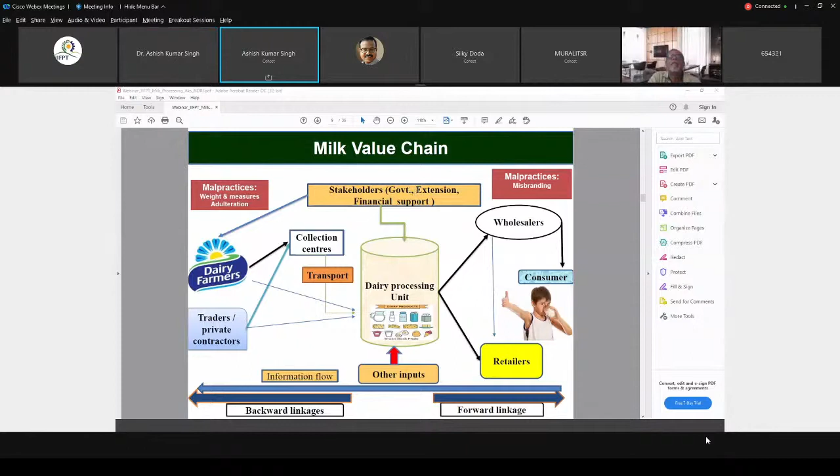So how best we communicate, and there are many challenges like malpractices and misbranding, and a lot of stakeholders. So how to do it in the form of backward linkages or forward linkages, that is the real challenge. And before one ventures, either as an individual entrepreneur, in a group, or in a formal organization, first of all they have to understand the different players and how best they can create synergy among the various players.

Here I want to give an idea of the different types of supply chain existing. If you look at the first chain, where the producer is directly selling their produce to the market, either liquid milk or some processed product, definitely the transit time will be less. So the problem of adulteration or spoilage is usually minimized. The producer will get a remunerative price and the consumer will get a good quality product.

The more the stakeholders, the longer the transit time, and issues like high microbial count, zoonosis, adulteration, contaminants, and preservatives generally emerge when we have a number of intermediaries in our supply chain.

And nowadays, whenever we talk to a common person about milk quality, he always considers it as freedom from any kind of adulterant. But milk quality is a very holistic approach. It's not only related to that, but also to pathogenic microorganisms, microbial counts, and antibiotic, pesticide, and heavy metal residues. Many processing-induced contaminants may also come during processing.

So it is our responsibility now to make people aware of the other challenges and the food safety issues which we normally encounter during the supply chain. As far as the cold chain status is concerned, the Ministry of Food Processing Industries has done a lot, but still this is quite dismal.

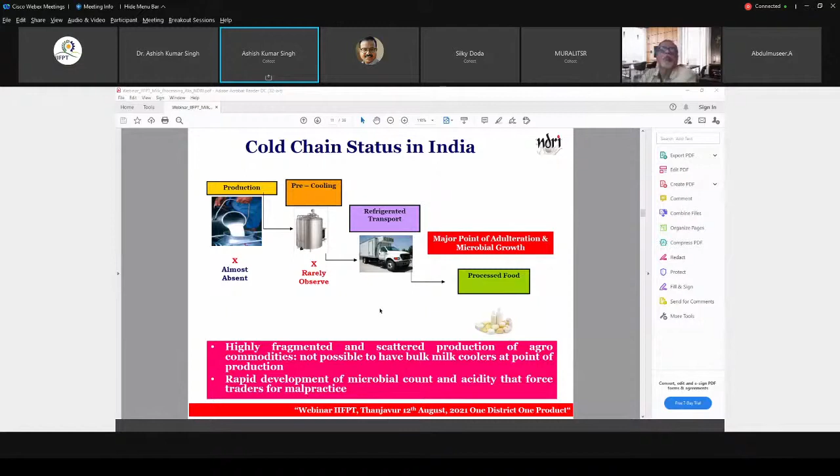And moreover, the utilization, because the majority of cold storage stores are generally occupied only for 6 months, and that too for a limited range of commodities, mostly horticultural commodities. Then, if we have to transform this unorganized sector into an organized sector, the very first challenge is how we can ensure uniformity in the raw material. If the raw material is good, the finished product quality will definitely be better.

For that, we have to adopt appropriate technological packages, because the kind of production technology used in the unorganized sector is not scientifically based. There is a lot of generation of residues. There is very little emphasis on the fat, SNF, the initial product quality, and optimized parameters.

Another requirement is how we can adopt the process line for indigenous or traditional products, an energy-efficient service system to support production, effective packaging, and moreover, for an entrepreneur or business person, what is the optimized product mix which will ensure a better return? That is also one area where we have to work and communicate with the processors.

Then, how to implement stringent quality assurance, hygiene, and safety provisions, especially under the ambit of the food safety guidelines. Another challenge, or information which is very important for any new person, is how to design effective marketing and promotional strategies. I will give you some examples subsequently.

Just see the raw milk revolution, because despite the benefits of consuming pasteurized milk, a majority of consumers still prefer to consume raw milk. India is one such country where there is no prohibition under the law against selling raw milk in packaged form. But there are a number of challenges which we often discuss with entrepreneurs. The best option is to go for a glass packaging system instead of polymer packaging. Innovations like vending machines are also important.

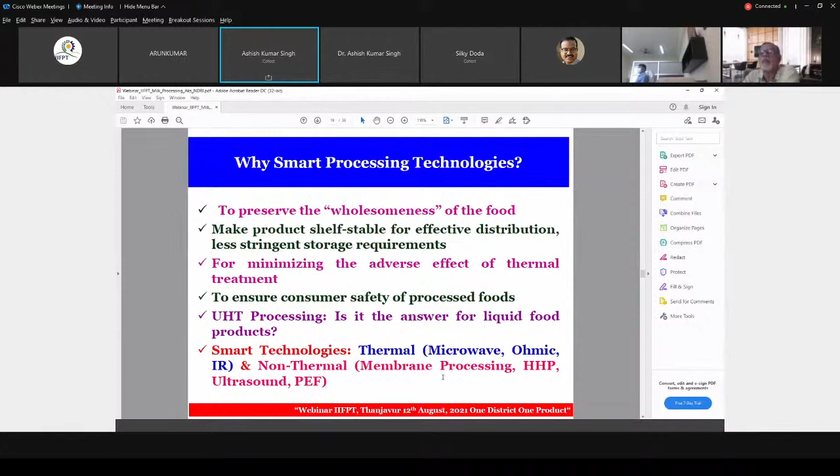Then promising packaging solutions - I will not go into detail, one of my colleagues, Dr. P.N. Raju, will discuss that. But this is the time when, at least for the niche market, we have to look for smart or promising packaging solutions for our dairy products to ensure safety.

Then, dairy industry cannot survive only with a limited range of products. So definitely it is an opportune time to diversify, and they have to keep on diversifying, because in dairy products, especially in the northern belt, there is another issue of seasonality. Some products are only popular, quite in demand, in a particular season.

The industry has to keep on adding a new range of products, and the base for this kind of work should be pleasure or sensory attributes, convenience, and health attributes. Whenever we design or formulate a new product, these are the three important components which we have to give due consideration.

So prospective categories of dairy products are like fortified and ethnic dairy products, gourmet food, functional beverages, composite or fusion food, and then specialized products especially for geriatric or aged persons, for weaning purposes, or for people suffering with one or other kind of diseases. For that also, milk is having a lot of scope.

So liquid milk can also be a very ideal source of delivery system for micronutrients. In our institute, our research group has done a lot of work on micronutrient fortification using vitamin A, D, calcium, and iron. Milk is one of the ideal vehicles for delivering these micronutrients, especially the skim milk. After fat removal, there is substantial reduction or almost complete elimination of vitamin A and D.

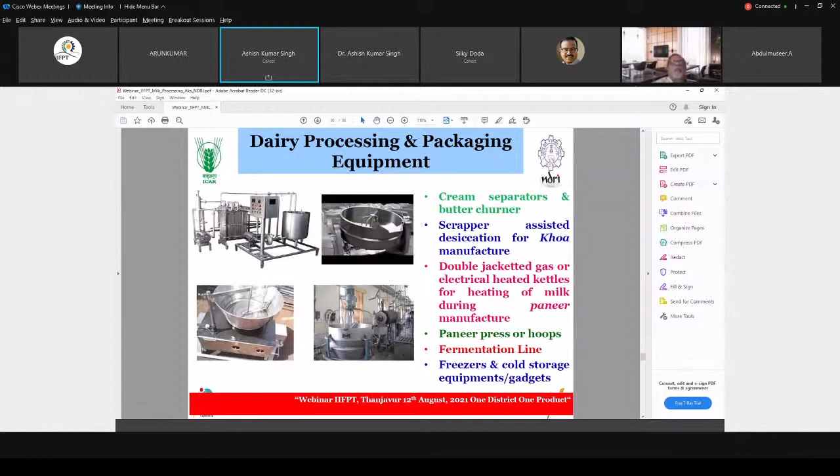This is a very positive sign, and as I mentioned, especially from an energy efficiency point of view and slightly more automation point of view, the dairy processing equipment manufacturing industry still has scope to work on those aspects. This is also a very important time when the government has launched a very good startup ecosystem which is in place, providing opportunities for capacity building, consultancy, outsourcing hub, business incubation centers, testing facilities, and IPR related issues.

So all under one roof, one can get all this information. I'm just giving you two success stories of our incubation center. The first is Misty Farmer Producer Company, a consortium of around 300 milk producers.

We worked with this group on both backward linkage and forward linkage, assisting them in improving their milk production, productivity, and quality. We also provided plant and machinery to start their business. They purchased technologies like Bajra Lassi and whey-based drinks, and with us, they innovated products like milk-based sweets using non-dairy solids such as fruits and vegetables. Currently they have a turnover of around 2.5 crore rupees, collecting around 7 to 10,000 liters of milk per day.

Another innovation is by a couple who own a farm with around 250 animals of good productivity. They simply chill the milk, fill it in gable-top biodegradable packaging, and sell it in the niche market at around 150 to 160 rupees. They are even converting their surplus fat into butter and ghee, and all kinds of technical support for that is provided by us.

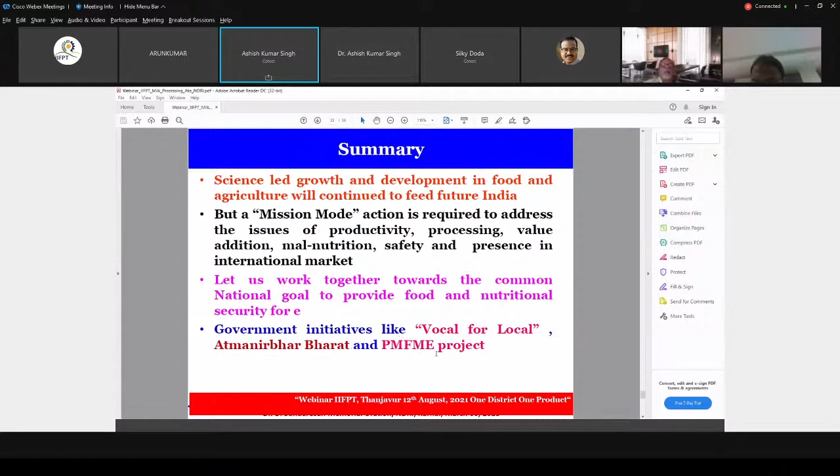Government initiatives like Vocal for Local, Atmanirbhar Bharat, and the PMFME project can be an integral part of this journey. Thank you for giving me this opportunity to present, and for your patient hearing. Thank you, sir.

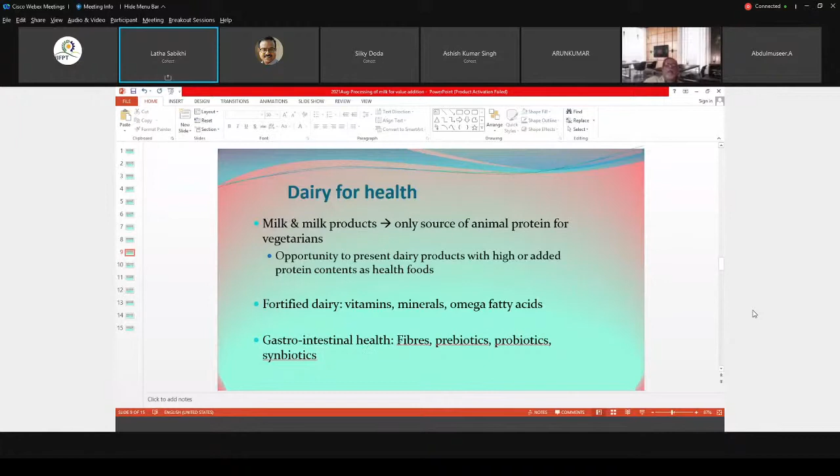And the dairy products can also be fortified with vitamins, minerals, and other nutrients, omega-3 fatty acids. And for gastrointestinal health, the addition of prebiotics, probiotics, and their combination, synbiotics, increasing the fiber content of the dairy products. All these are the choices that one has when we are talking about dairy processing.

Then dairy for health can also include plant ingredients to increase immune health, and products for a particular segment of people, like geriatric products, products suitable for lactating women and women who are breastfeeding, for children, infants, and those involved in sports and a more active lifestyle. Foods for diabetic individuals, those suffering from CVD, and our ancient science of Ayurveda always had medicines which include dairy ingredients for helping the health of eyes, bones, skin.

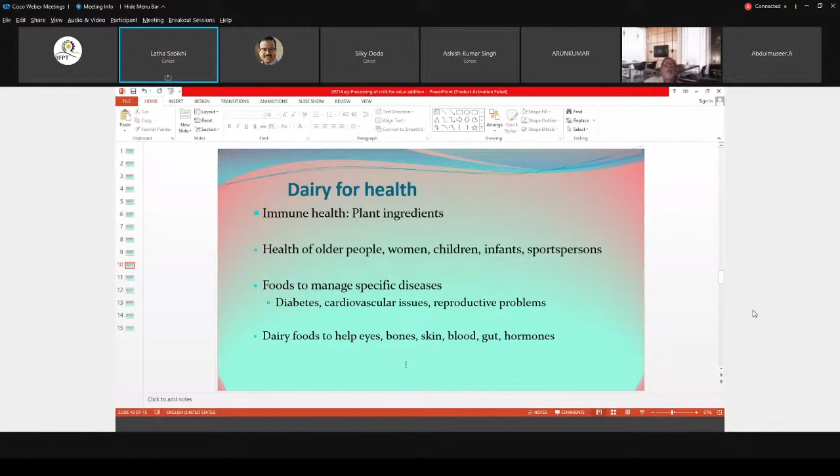Maybe in place of these medicines, we can position the dairy products themselves as food, so that their routine consumption can keep us away from these diseases. Non-bovine milk: a lot of R&D activities are going on in this, and dairy products such as cheeses, powders, and other value-added ingredients can be processed from these.

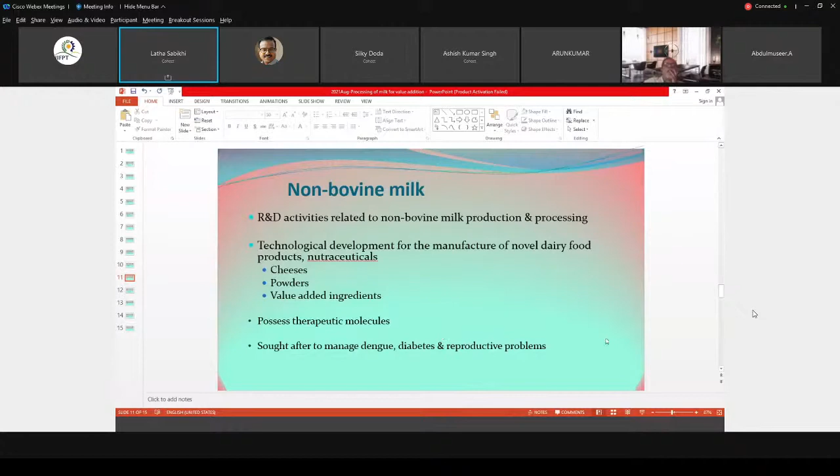We already know that goat milk is being marketed to manage the mosquito-driven disease dengue, and camel milk is positioned as being good for diabetes. However, a lot of scientific intervention is required now, more than ever, so that the particular ingredients responsible for these therapeutic actions can be identified and maybe marketed as high value, low volume products.

Now, the way forward for the dairy processors and dairy manufacturers: there is commercial value for high value dairy products, which can be applied in the food and pharmaceutical industry. I concede that this is one segment which requires higher infrastructure. But as a part of the classification I had done earlier, we have milk protein concentrates, buttermilk powder, whey powder, colostrum ingredients, modified milk proteins, whey fractions, which are all high value, low volume ingredients that can be part of this niche product area.

For a larger canvas, we already have a thriving dairy industry. We have a lot of cooperative societies, the milk federations in the states, and also other multinational and local companies which are making and marketing dairy products. However, there are still problems, and this organized dairy is only a very minor fraction of our dairy industry.

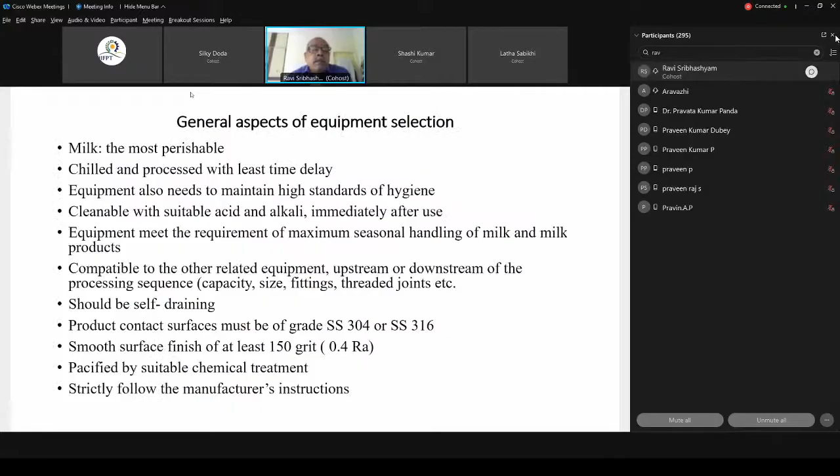Let me briefly tell the aspects of the equipment. Milk is the most perishable of the agricultural commodities. It hardly has a few hours, maybe maximum 3 to 4 hours. So it has to be chilled without any time delay. That's the most important. In any processing aspects of the dairy industry, time is always a factor.

And since it's an edible food product, it's perishable as well as a food product. So high hygienic standards have to be maintained for the equipment, and it should be cleanable. So the design aspects of how the equipment are joined and designed should be appropriate for cleaning, with CIP cleaning or even manual cleaning. We'll see with slides some of the details of it.

The dairy industry being seasonal, it has to take care of the maximum demand when it is happening, say October to February, the procurement. So it should meet the maximum demand day. So mostly, because of the seasonality, the equipment will be over-designed. If buying the entire assembly in one go, it should not be a problem.

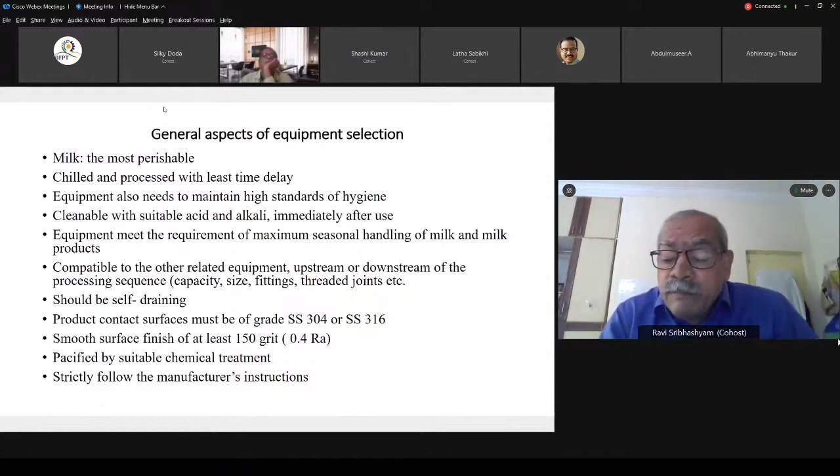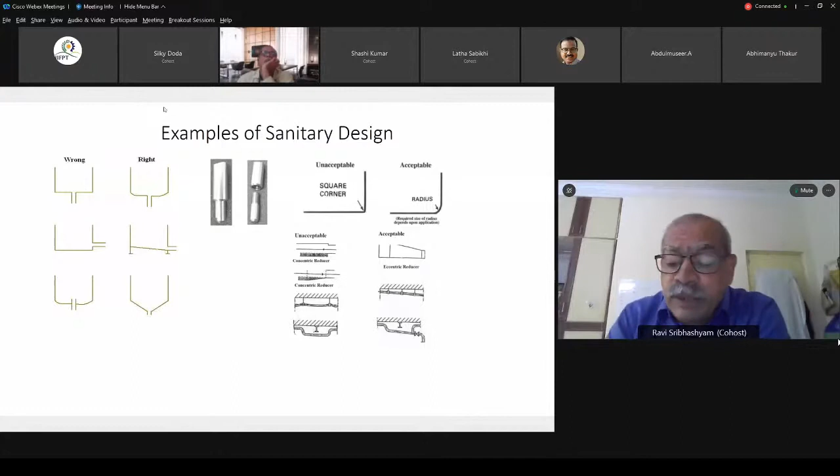Even in the pipelines there are invisible contaminants. If you see the pipelines, from a large pipe to a smaller pipeline, unless there is a proper joining, there can be an accumulation of liquid. And moisture is the best medium for bacteria to transport. Even the slope: over a period of time, it may get saggy, but you should take care. There must be proper sloping. These are actual defects. If you see over here, the water is still stagnant, so that should not happen. Even a little bit of water accumulation will be problematic.

And also the welding: all the welds should be properly ground to smoothness. In engineering welds, they say if you grind it, the strength will go down. But here the welding has to be ground to smoothness. That's the difference between normal equipment and the hygiene that has to be there.

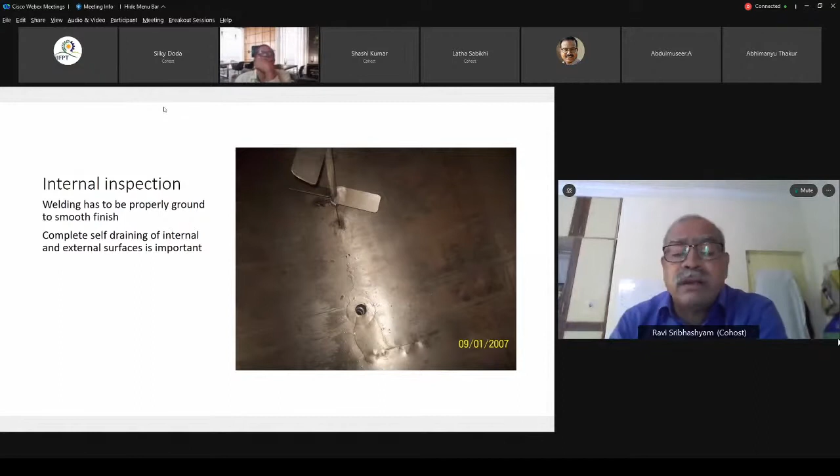Here again, this is an actual photograph taken during inspection. The welding spatter is still there, and that means over a period of time it will get dislodged. Of course, it's a contamination, but it will also get dislodged and go into the milk or whatever the preparation. It is actually a ghee tank that I had inspected, and I was surprised to see such a poor finish. So do not just trust.

Even while the fabrication of the equipment is going on, you can insist with the manufacturer or supplier that you will inspect the equipment during fabrication itself, because once insulation is put on, you cannot exactly test the finish of the system inside.

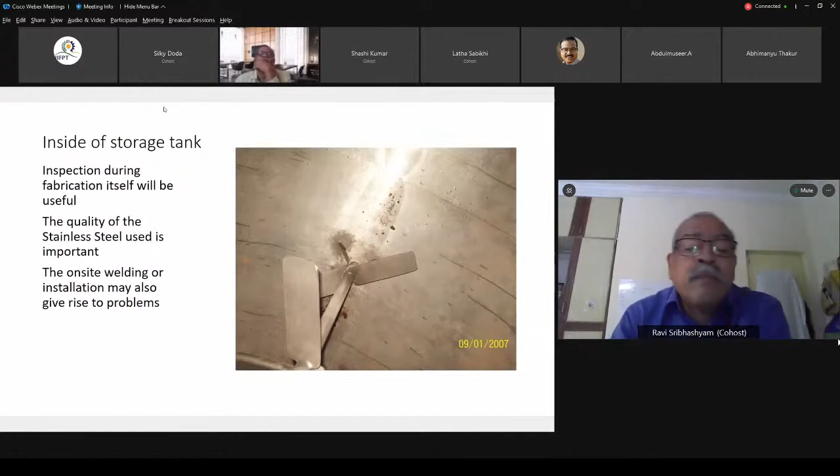Yeah, the speakers were insisting on cold chain, etc. The very first equipment that we encounter is the bulk milk coolers. Bulk milk coolers are generally given to the ISO 5708 standard. But there are certain minor details. Say it is 5708, 2A in Roman numerals. 2 means it's suitable for 2 milkings.

Again, a crucial point. That means it can cool half of the milk collection in the morning and half in the evening. A is the ambient temperature limit, say 38 degrees centigrade or so. And also 2 is the speed at which it is cooled. So 2 means it will cool the first milking, that is half of it, in 3 hours, and the second milking, added to the first milking, in 1.5 hours.

Here comes the devil in the detail. It's a European standard, so they assume equal milking, equal quantity morning and evening. But actually in India, the farmer supplies the high-fat milk in the morning and keeps the low-fat milk for his own consumption. So usually it is 60-40 or even 70-30.

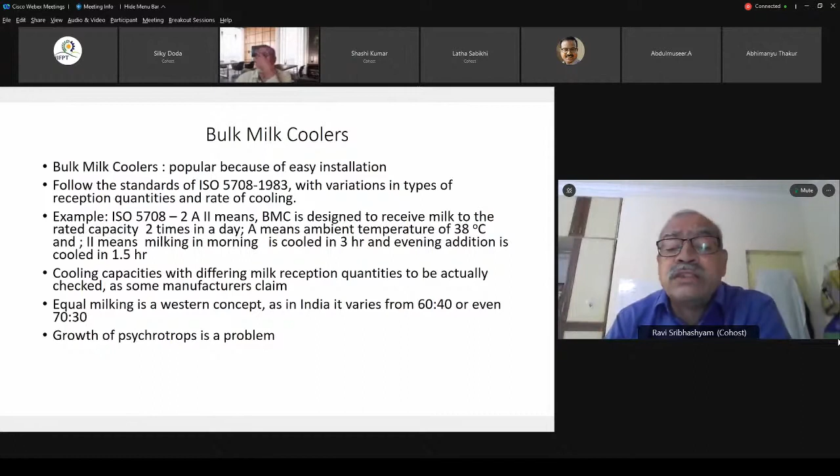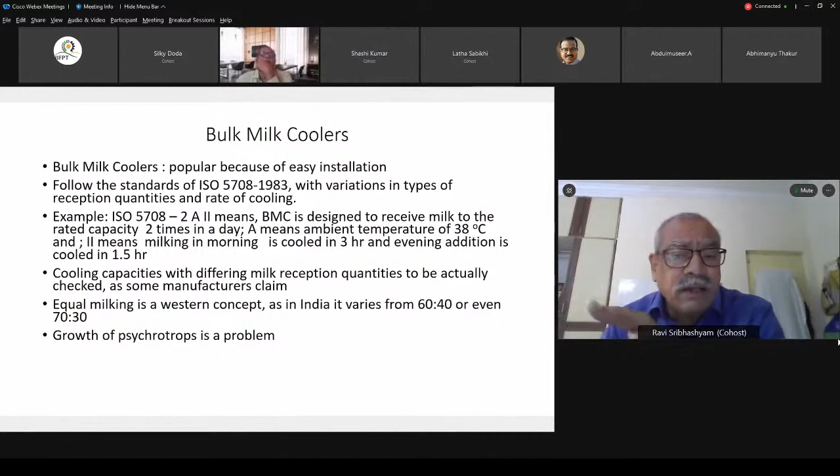So the size and capacity of the bulk cooler is crucial when you are selecting. If the capacity is small, then cooling is slow. If the capacity is too large, then milk may even freeze if the control systems are not that good.

So here the bulk coolers are of 2 types: direct expansion type, where the refrigerant is directly put into the dimpled outer jacket of the tank. This is the bottom view of the tank. So these dimpled sheets are the costliest component, and usually it's imported. Nowadays, I think probably it's being manufactured in India also.

The other one is the IBT type, where the tank is there, but at the bottom there will be a liquid water tank. Submerged in it are the cooling coils, that is, the refrigerant coils. And the pump will spray the chilled water to the side. The small advantage is that you can run it for a longer period of time with a lesser capacity compressor.

And nowadays, instead of 3 hours, the concept is you bring down the temperature to 10 degrees fast. And then if it is a bit slower also, microbiologically it is not that significant. So what we can do is have a small plate heat exchanger. We'll discuss later on. The plate heat exchanger can be fixed, and this chilled water can be circulated in parallel to the milk that is being circulated. So that is one innovation here which can increase the speed.

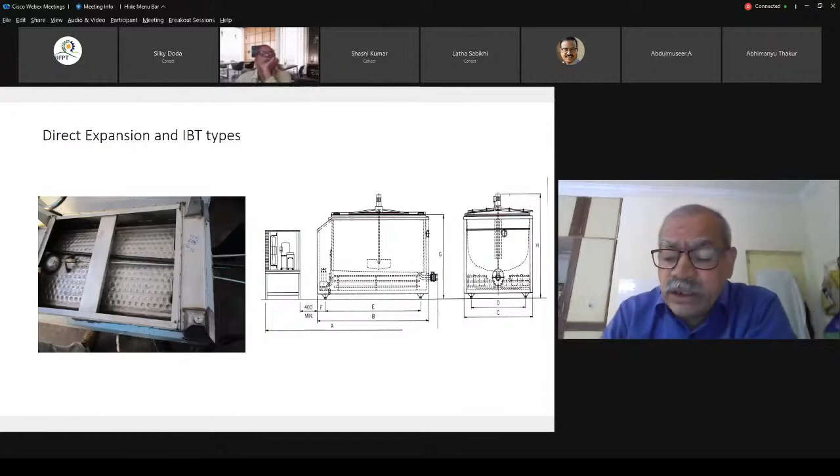The other innovation is in the refrigeration system. The heat that is expelled in the condenser can also be stored, and the efficiency can be improved. These are the wide varieties, where we have the direct expansion type, shown earlier, and also the ice bank tank type. The sizes differ from 300 liters to 5,000 liters.

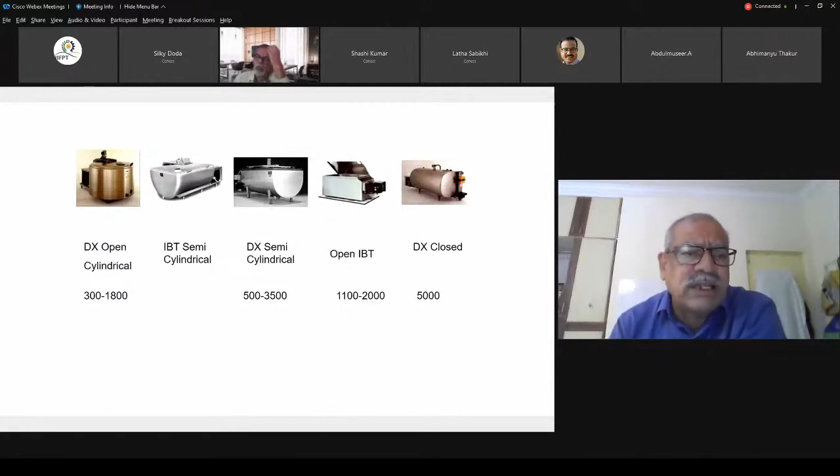Generally, from the management point of view of the collection center or the overall economics, they say that minimum it should be 1,000 liters or 2,000. Very few villages or village clusters are getting more than 1,000 liters. Especially here, the problem is too many players are chasing too little milk in villages. This is a fact. So therefore, each player is getting much less than 1,000 liters or 500. It's not like in Gujarat, where each collection center itself will be having 10,000 liters. So the crucial thing is the capacity of the bulk cooler that has to be chosen.

So this is the IBT type over here, and of course I had already discussed things. If you add a small plate heat exchanger, then the speed of cooling up to 10 degrees is fast; this is the best way. Bulk milk coolers, if not located properly, and if you are collecting milk from far away, then it is a waste, because the psychrotrophs will grow, and that will cause bitter peptides in the milk. So location and size of the bulk milk cooler are crucial. And many of the dairies felt that it is better to have a chiller directly at the plant.

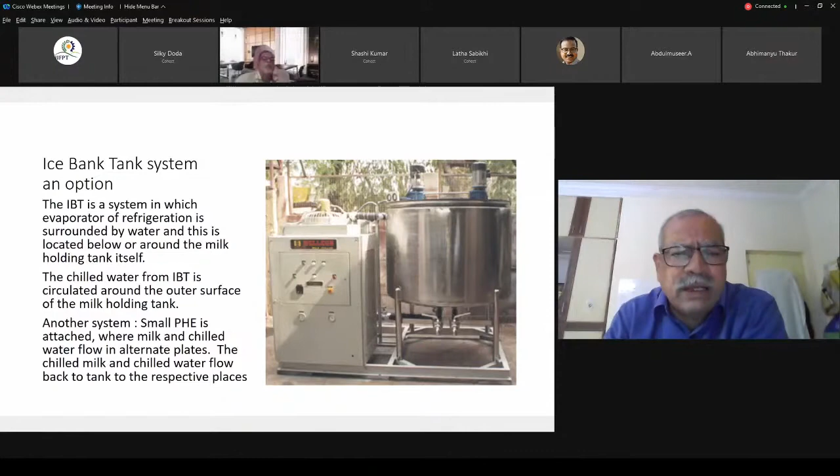So the next equipment is the plate heat exchanger, where the frame will be there to which the plates are hung, and the gap between the plates is maintained by the gasket, and in the plate pack, one is at the fixed end and the other is pushed, and the plate pack is brought together. The advantage is you can see the surface of the plates for cleanliness, and the corrugations bring rapid transfer of heat, and instead of a bulk cooler where the milk is in bulk quantity, here a narrow thin layer is passing. Therefore, in a few seconds the milk is chilled down to 4 degrees centigrade.

This is the main advantage of the plate heat exchanger. Now it is ubiquitous in most of the dairies. Plate heat exchangers are being used for many heat exchange applications. Alternate gaps carry the process fluid, and the other alternate gaps the service fluid, which may be chilled water to chill or hot water to heat, as we see in the plate pasteurizers.

So this chiller must be properly designed, with capacity matched to the previous dumping rate, or the tanker dumping rate, and also to the next processing storage tanks, etc. So the chiller capacity must be synchronized with the upstream equipment, crucially. Then downstream it may be a storage tank.

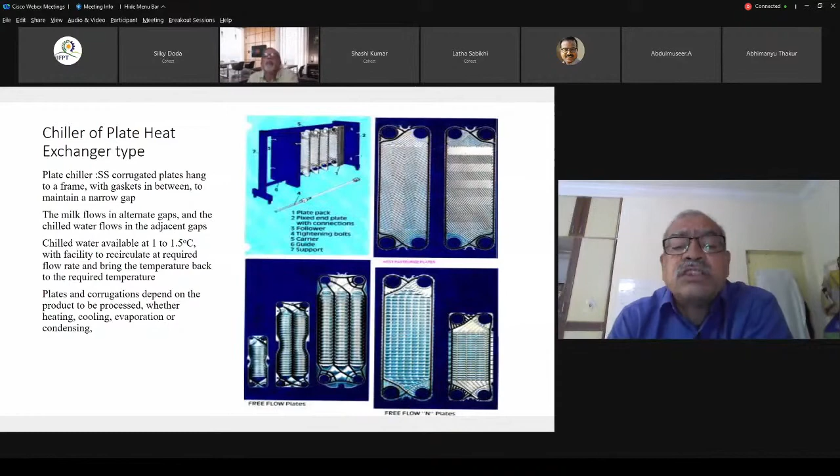expanded polyethylene, and that also should be of sufficient thickness not to raise the temperature by 2 degrees in 18 hours. That's the standard. So you should fill the tank with chilled water, say at 4 degrees centigrade, and see that the temperature does not rise. That's how you will test the storage tank. And also there shouldn't be any leakage.

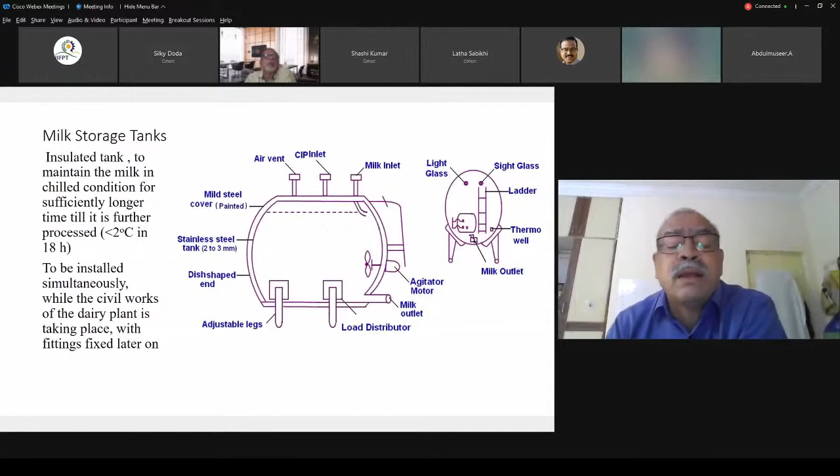But the storage tank should not be filled to a very limited load. If it is 10,000 liters, don't keep 1,000 or 1,500 liters; the temperature is going to rise faster. That's an important thing. You have an agitator through a reduction gear system, agitating around 28 to 30 RPM. Care must be taken that the lubricating oil does not flow into the milk and create an unhygienic condition.

So the next stage of processing is pasteurization. For small scale, batch pasteurization is the best one. This is low temperature, long time, that is 63 degrees centigrade for 30 minutes, though the time temperature combination may vary. This is a double jacketed one. The inner cylindrical vessel is surrounded with a jacket in which hot water or chilled water can be supplied at a particular rate. A continuous circulation one is also possible.

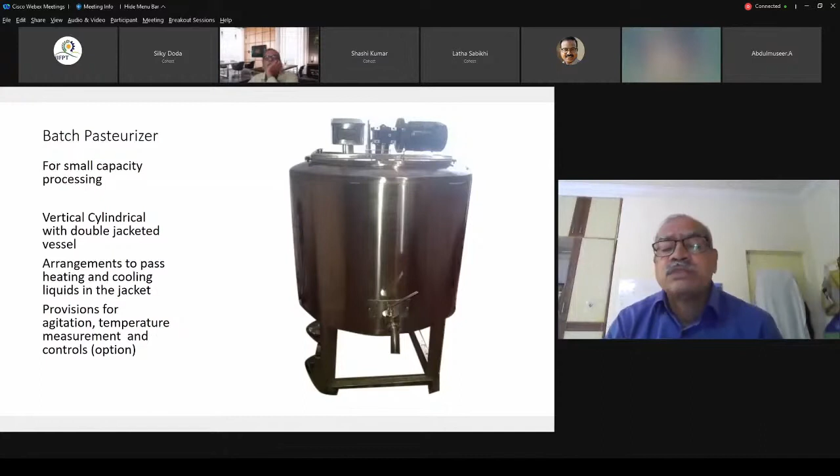The temperature has to go up from the 4 degrees centigrade of the storage tank to 63 degrees centigrade, which will take time. Then it is held at that temperature for 30 minutes, and then the hot water is drained and chilled water is supplied. It has to be provided with an agitator, and some controls may be there. You can choose from 100 liters to even 1,000 liters. It's a multiple purpose tank; it can be used for other purposes also, even for storage if it is a small scale one. So it's a versatile equipment.

The other one is the HTST, the high temperature short time one. Earlier, installation capacity used to be a big affair, from 5,000 liters to 10,000 or 20,000 liters. Now skid mounted units are available, very easy to install, right from 100 liters per hour to 500 liters and 1,000 liters per hour. For a small scale operator, this will be ideal.

Only thing is you must have a steam supply and chilled water supply for this, and they should be of sufficient quantity to match the capacity. Sometimes they may not match the outside one, so you have to take care of that. The temperature may be 72 degrees centigrade for 16 seconds normally, but because the quality of milk is poor, we may go to a higher temperature, 78 degrees centigrade, and cooled.

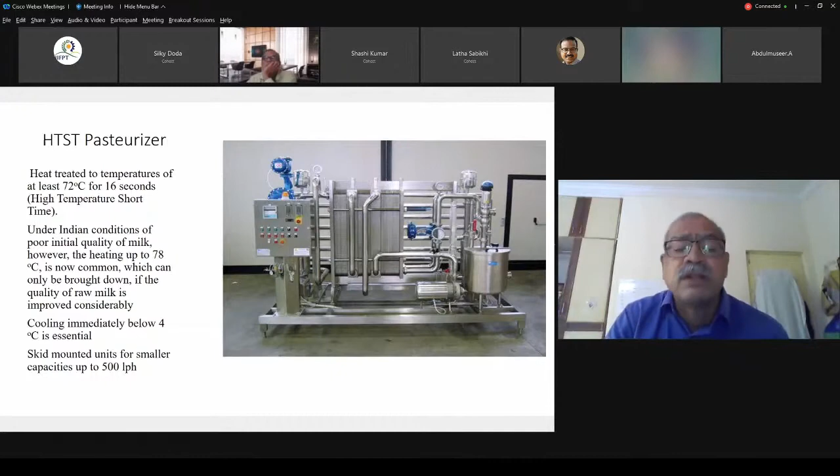Here it may not be possible, but if it is a larger one, insulation is important, especially insulation of the equipment. So this is the one equipment. It is linked to the cream separators also, so that at a particular temperature it can be taken out at 40 degrees. The cream separator can also be there.

If I go through the sequence, the pump is here. The flow rate is controlled so that it will pass through the holding section for 16 seconds. This has to happen at the installation time itself, that's the important one. Then it passes through various sections, each being nothing but a plate heat exchanger, with a connecting plate so it can be tapped for various other processes like cream separation or homogenization.

So at 40 degrees or so, it may be connected to filters and cream separators that must match the capacity of the pasteurizers, again an important one. Then the heating section, then it may go to around 55 to 60 degrees, to the homogenizer, and then back for heating.

The heating is done by hot water, not directly by steam. The hot water is generated either through an expansion vessel in which steam is directly introduced into the circulating water, or through a plate heat exchanger, or even a tubular heat exchanger. Nowadays it is a tubular heat exchanger, so almost 3 generations of variations have been updated. The older one had only the vessel where steam is directly heated, but now the plate heat exchanger or tubular heat exchangers can be there.

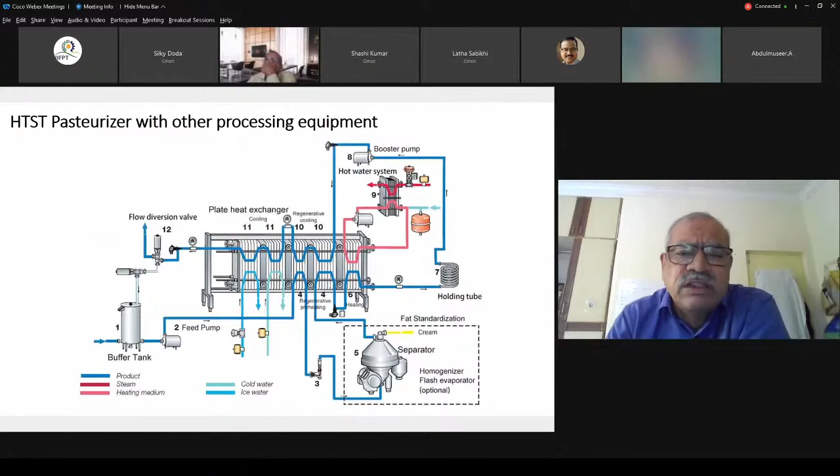A little bit of warm milk, if it is there, is sufficient for separation of the cream. We have a spindle and motor rotated with discs inside that can rotate at sufficient speed so that the higher density milk, around 1.028 to 1.032, is pushed to the periphery, and fat is pushed to the center. When the cream is pushed to the center, the cream outlet can give around 25 to 40% fat cream.

A cream screw is there to control the flow rate. The entire body may be of stainless steel, or if it is mild steel, then properly painted for maintenance. Even the discs are sometimes tin or something, but stainless steel is preferable, with a float control.

Float also should be stainless steel nowadays. Earlier it used to be tin or something, but it's not permitted now at FSSAI. The alignment must be proper, otherwise the cream separation will not happen, and there will be a loud sound, etc.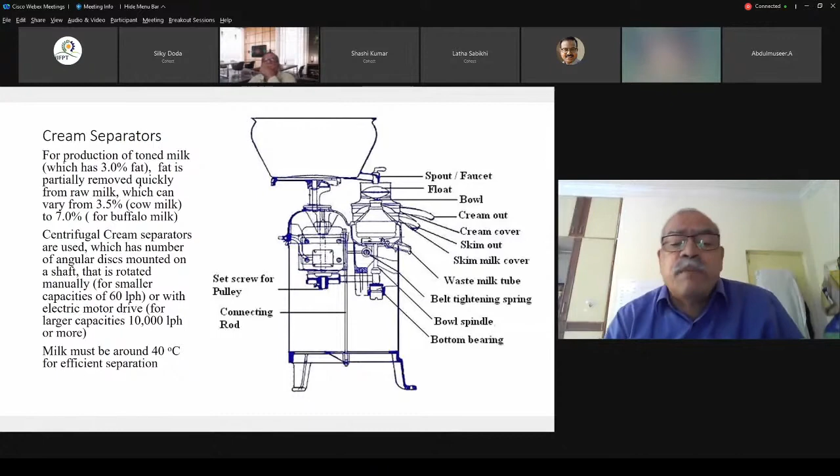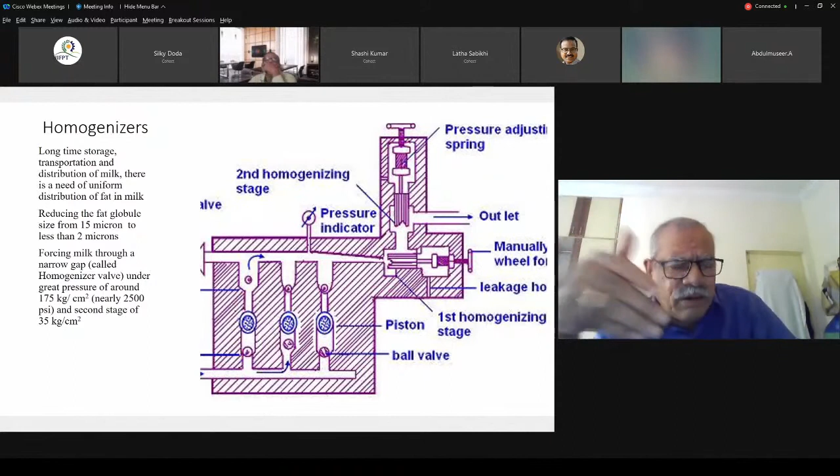The other one is the homogenizer. I skipped the bigger ones because for entrepreneurs, the smaller capacity, 1,000 liter cream separator is more than enough. Bigger ones online, you have hermetic cream separators and also self-desludging cream separators, but I'm not covering those due to shortage of time.

So we have homogenizers where the entire system of developing pressure is the main equipment, and then it is released in two stages. One is at 175 kg and another is at 35 kg pressure. There shouldn't be any air leakage, and the capacity of the homogenizer should match if it is online to the pasteurizer.

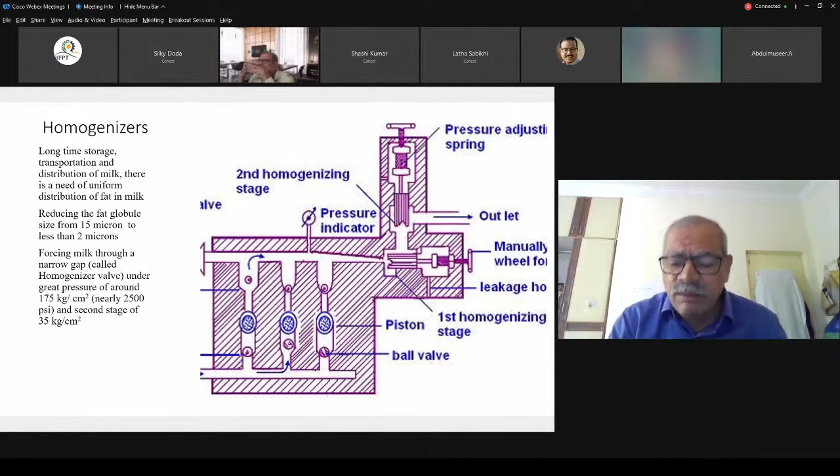The homogenizer may be a single cylinder one where the pulsations are more, or maybe 3 cylinders or 5 cylinders. That choice depends on the capacity and cost, but usually 3 cylinder is the most common one. We have an individual offline one, or it may be connected to online homogenizers of different capacities.

The line must not have air, otherwise the pressure gauge will fluctuate too much. Also, if there is a pipeline, the pipeline supports must be independent. They should not weigh down onto the homogenizer and convey vibrations to the pasteurizer if it is online. That's an important point. The capacities here vary.

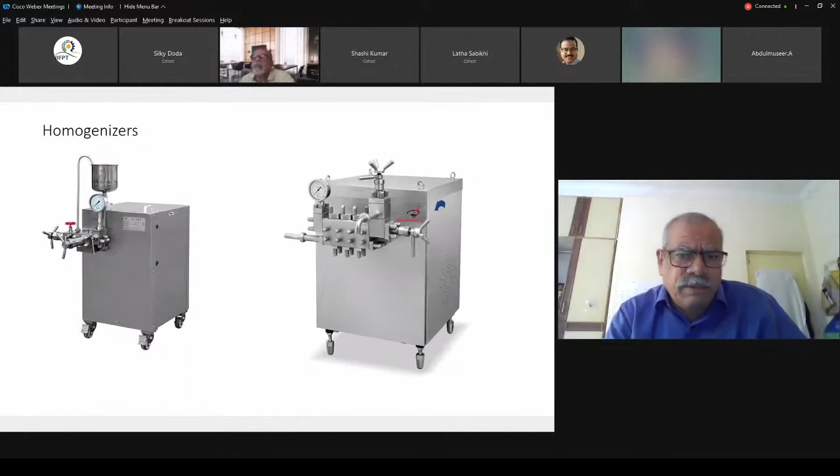Indian manufacturers' ones are still not up to the mark, so to say, but the valves and the connecting rods usually go well with the unit. We also have aseptic homogenizers, used for UHT processing online.

The boiling point will hardly exceed 55 or 60 degrees centigrade with control of the steam, and the condensation happens by the tubular heat exchanger, where water through a cooling tower will be cooling and condensing it. The main thing is that you have to be watchful that the effervescence should not be too much, otherwise milk droplets may also get carried away along with the vapor. You will have to take care of that.

So this is again a versatile equipment for startup people, where any liquid food can be concentrated safely without any damage. We have tried it with sweetened condensed milk, with some fruit juices, and also with fruit pulps.

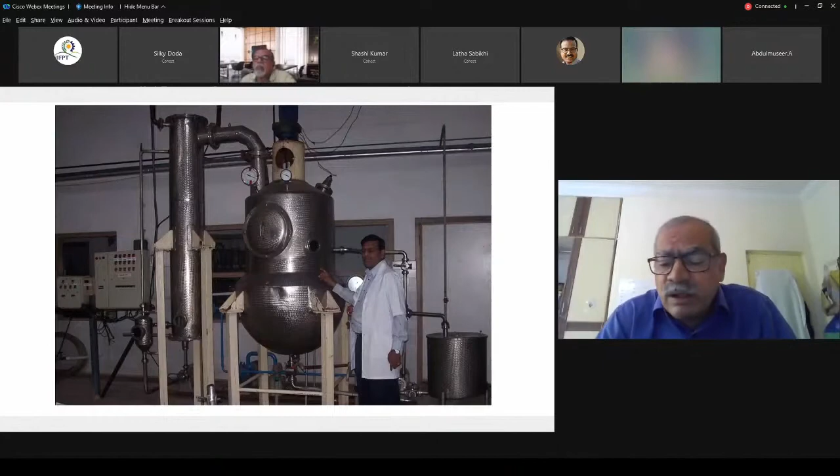So for installation, we will have to follow the main instructions. These are the general instructions for manufacturers and for people when you're buying. Manufacturer instructions must be followed.

The manufacturer may sometimes exclude some required items, maybe support, say some civil works or service lines that are out of the battery limit. You have to synchronize their supply and complete them in time, otherwise the delay may cause project delays as well as legal aspects.

When you are taking the trial runs, you see that the manufacturer is present, and if there is a deviation in the claimed capacities, then either you penalize them to a certain extent before hand in writing, or you may outright reject if the performance is very poor. That's again an important one.

Then important are the drawings, especially the plate heat exchanger drawings. These are necessary if we suddenly want to expand the plate heat exchangers, or replace the gaskets, etc. We should have them in duplicate, so one is kept safe and another is available in the plant itself.

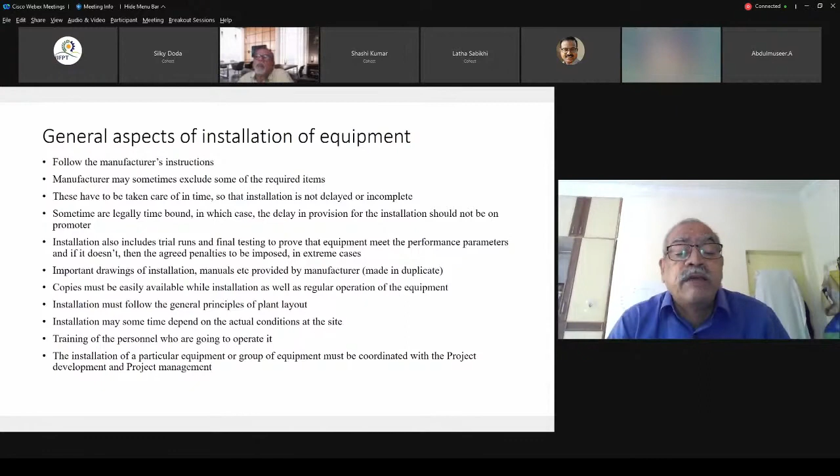It's almost the same. The installation should be time dependent, of course. Then the training of the personnel is also an important one.

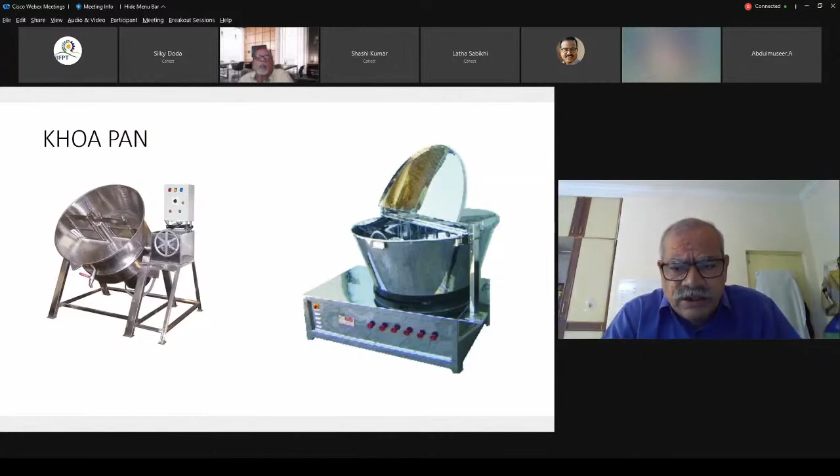These are small scale equipment I showed earlier, ranging from 10 liters to 100 liters. These are available both gas based, steam based, as well as wood based.

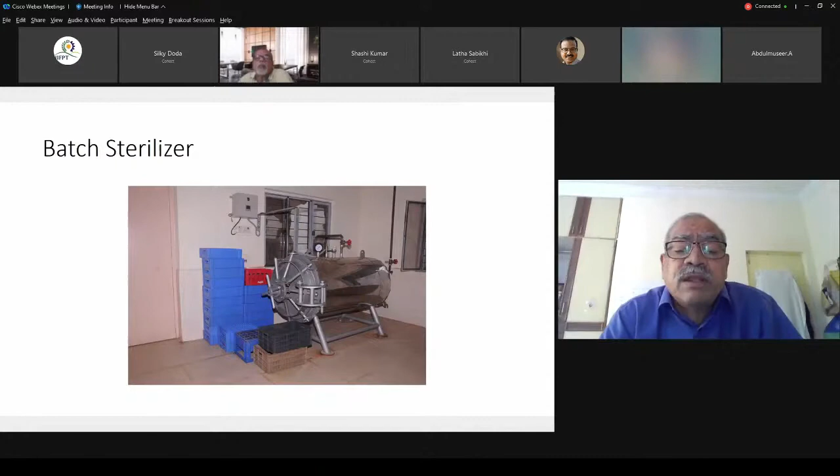Given the supplies, this is again a batch sterilizer for a small scale. The service equipment can be small also. With this 150 kg boiler, say 9 to 10 kgs pressure it will supply, and also chilled water supply can be there.